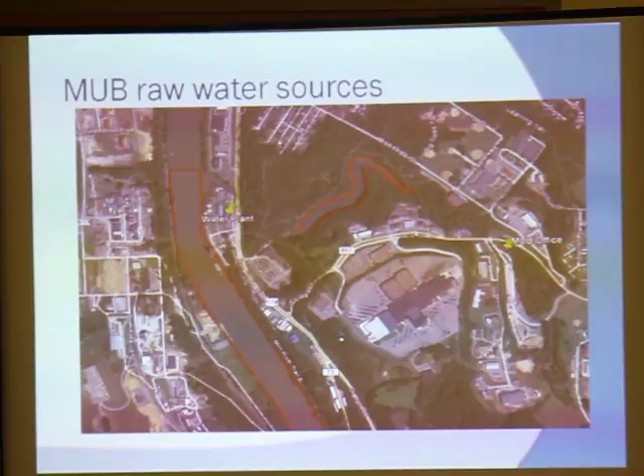For 2014, that's the data I'm going to speak with. That's the most current year I have to work with right now. We processed over 4 billion gallons of water. That's a heck of a lot of water to process and put out into the system for our drinking water system. That breaks down to about 11 million gallons per day. 80% of that we actually drew from the Mon River. Okay, the remaining 20% we took from Cobun Creek.

All right, this is the table I was referring to. It is in the Consumer Confidence Report. It's on page 6. Okay, these are chemical constituents that we've done the analysis for the raw water source, the Mon River and our Cobun Creek Reservoir. I don't expect you to take a lot from this. Peruse it later on. It's just here to give you a detailed look at a bunch of the parameters that we look at when we're trying to establish what kind of water we're dealing with.

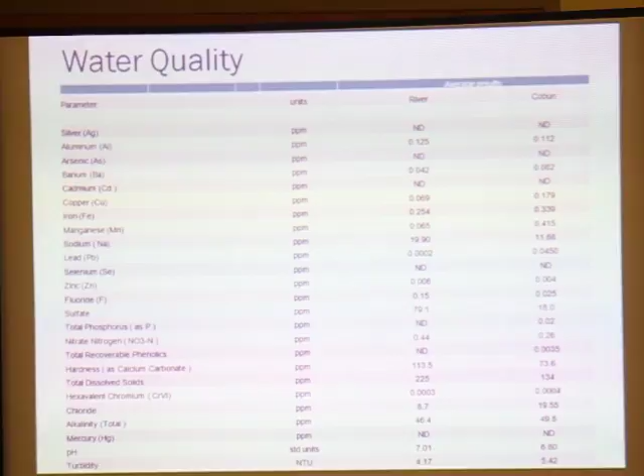Of particular importance, and maybe a little more common to people, if you look at the bottom 2, the pH and turbidity. The Mon is about a 7. Cobun Creek is just a little bit less than that. Very nice waters to deal with as far as treating it for drinking water sources. And if we look at the average on the turbidities, both are relatively low. Okay, so although the Mon does get turbulent and it does look a lot of brown sometimes because of the increased rainfall and all that, overall it is a very clean source as far as the amount of sediments that we get.

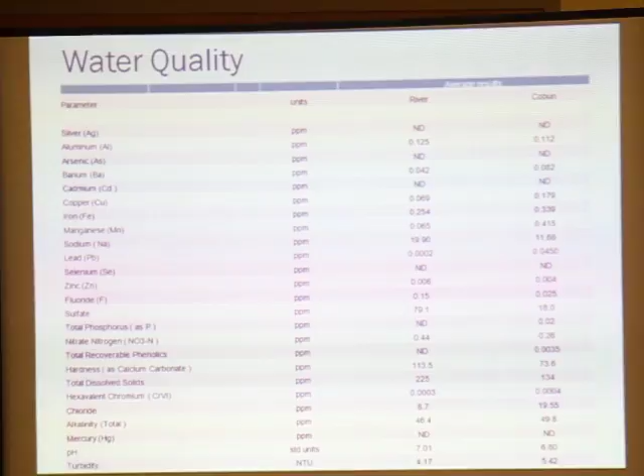Okay. I'm just going to breeze through several examples of some of the things that we've done, some other programs. If you remember back in 2009, there was a big to-do about a lot of the total dissolved solids that was found in the Mon River and then flowing up into Pennsylvania. We started a program back in 2009, and we've been monitoring the total dissolved solids in our raw water source in the Mon River up to current date.

Another program: we look at the amount of bromine or bromide that we find in our raw water. This is a concern for us because that is a halogen that can react with the chlorine that we put in for disinfection. And that, along with some total naturally occurring carbons in the water, will form what they call THMs, the trihalomethanes. We're regulated underneath that very strictly down to parts per billion levels. So the amount that we find out there can be significant to us.

We've been monitoring that since 2011 on a weekly basis also. We find very little of it out there. The little bits of spikes that we do and we have seen, those are pretty much related to events where someone has in the past been treating brine water from some of the gas well operations. Treatment plants on the wastewater side normally do not treat for the TDS very well, so it's almost a pass-through. That's why that practice has been stopped in the wastewater industry.

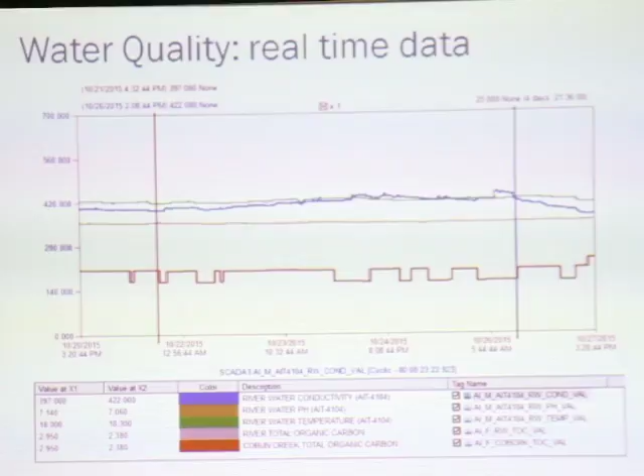As part of the program, we do look at our source water, and the initial data that you saw in here is just from some grab samples of our source water. With the advent of everything that's going on in our source water protection program, and we'll get into a little bit more when we start talking about it, we have developed a program where we're now actually going up into a large portion of our watershed system where we drain the water from.

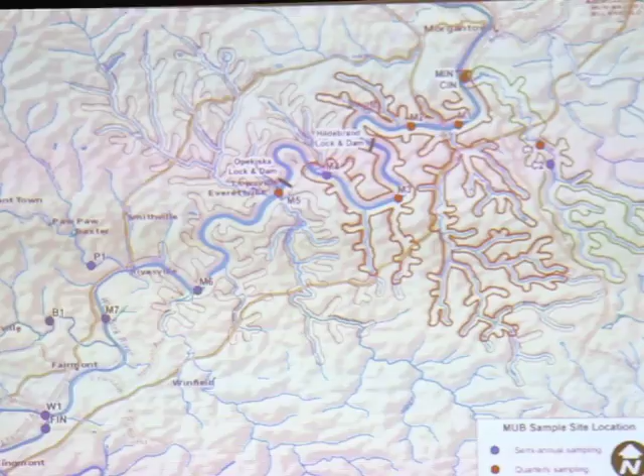This point right here, that's where the active plant is, our treatment plant. So we actually have 14 more data sites now that we're looking up into our watershed and going out there at least quarterly and sampling these sites for the different constituents. This is important, not that we're going to catch something just when we're sampling it, we might, but what this is doing is actually giving us a long-term database, so we can look at what natural trends are happening out there. We can see what's happening on a seasonal basis.

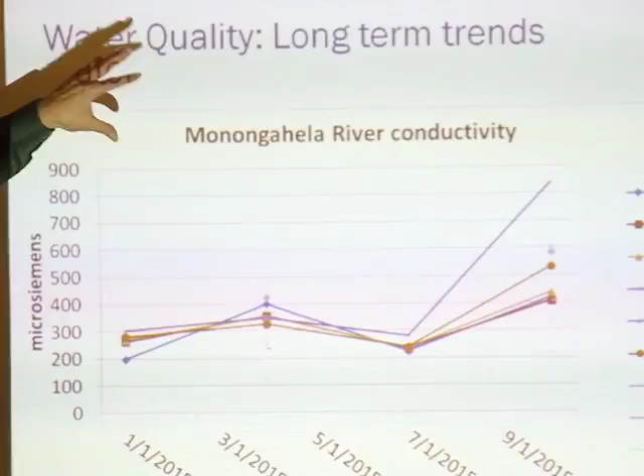And this is just an example of what we've already sampled on the 4 quarters there. But this delineates all the sites going up on the Mon River. This is conductivity. And you can see pretty much from the beginning of our sites all the way down through, pretty consistent. We have a little anomaly that we're looking at down here. This is readily explainable. This is during the fall, very low flows.

So what's coming into the Mon is not really being diluted. So we're seeing an increase in the amount of solid concentration just because there is not that much flow coming down to dilute it. So that's an example of a seasonal trend that we're going to be seeing. And as we develop this data over the next 2, 3, 4, 5 years, we'll start to get a real good database as to what's happening out in our drainage system with our tributaries.

There's also a bunch of other stuff we do. I'm not going to touch on all of it, but one thing that is significant: we have some Marcellus gas wells in the Morgantown Industrial Park. They actually reside almost right across the river from our water plant intake. Drilling and fracking operations started and have been going on since May of 2011. That's when they initially drilled the wells and fracked them. That period was pretty much very short, for about 4 or 5 months.

We did some very intensive sampling. And since then, we've kind of done it every month, every 4 months, every 6 months, just to monitor the progress of what's going on there, to make sure none of those activities has had an effect on our drinking water. Results to date, we've been very good with that. We have not found anything from those type of activities that has had an effect on our water supply.

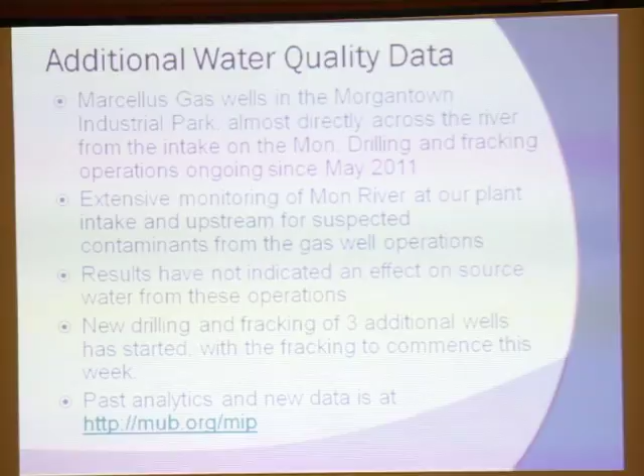Yeah. All right. That's just a very brief overview of some of our monitoring activities that we're looking at with the source water. Just a real quick look into the source water protection plan as far as monitoring upstream. We'll get a little more into that when we start talking about the program. Thank you.

So now with that background, we know that we're lucky here in Morgantown to have clean, raw water supplies. But clean raw water supplies can be fragile, and we learned that back in 2014 when 300,000 people lost their drinking water supply due to a chemical leak in the Charleston area. And it's been almost 2 years now.

One sort of silver lining out of that is that there was some activity in the legislature who were personally impacted by the leak. And a bill was passed in 2014, it was Senate Bill 373, that was a very large bill that had a lot in it, but among the most important parts of it were this first requirement here for water utilities across the state, like MUB, to update their source water protection plans. So that's what we'll be talking about mostly today.

Also for utilities to update their inventory of potential contaminant sources. And we'll be talking about that as well. That's part of the planning process. And separate, there was an entirely new law that regulated above ground storage tanks, because it was an above ground storage tank that leaked that caused this problem in Charleston.

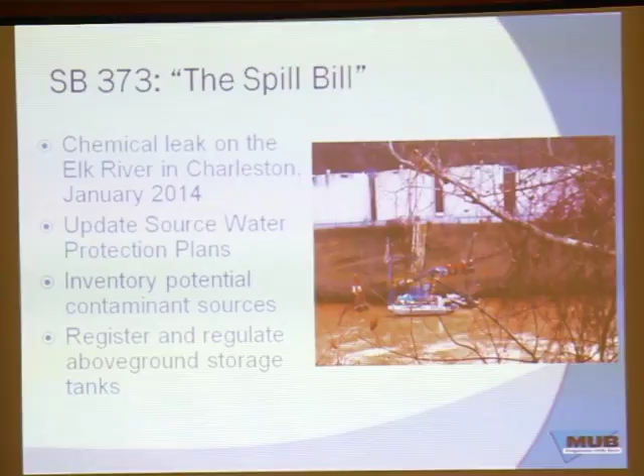A year later, so now we're in January 2015, the legislature took some additional action. This was Senate Bill 423, where they made some significant changes to the above ground storage tank act. Among them, there's many fewer tanks that are now regulated as compared to when the original bill passed. But the good news from Senate Bill 423 is it had virtually no impact on the requirements for utilities to update their source water protection plans. So all across the state, there's about 120 utilities that are now doing what MUB has been doing.

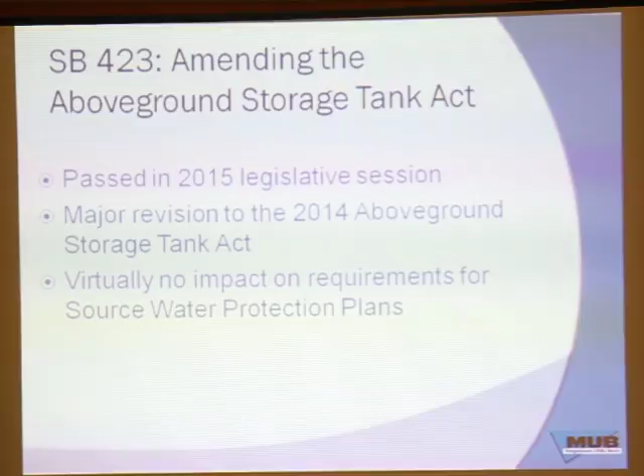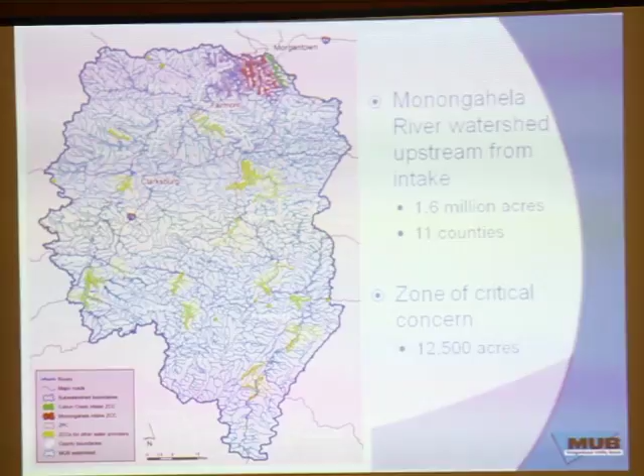This is a more detailed map of that area. It includes a couple of larger cities, Fairmont and Clarksburg. These yellow areas are zones of critical concern for other water utilities. So there's a lot of utilities that draw their water from the Mon River Basin. And again, these are the special areas up here that are closest to the intake. It includes parts of 11 counties, big area.

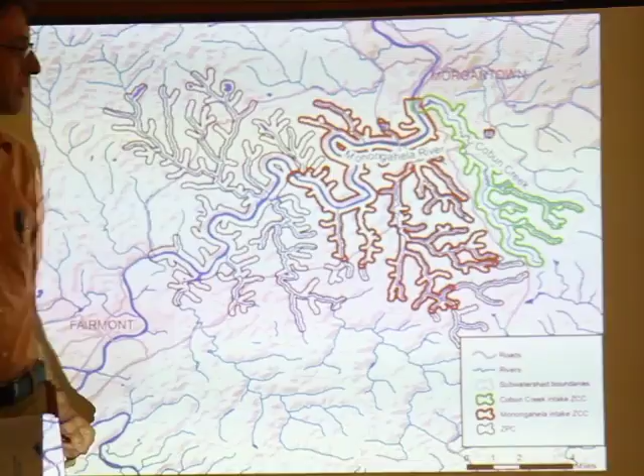Then zooming up to the water treatment plant. So we have Morgantown here and the water treatment plant here. And again, we're looking at these special zones. The red area is the zone of critical concern for the Mon River. So that's an area where water or chemical leaks or anything that reaches the water will get to the intake within 5 hours. And the green area is the zone of critical concern for the Cobun Creek intake.

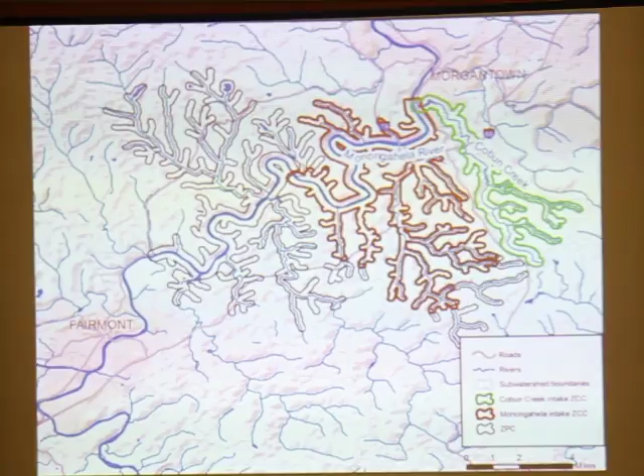And then we have a second area, which is this gray one, which is called the zone of peripheral concern. And that's related to how the above-ground storage tanks are regulated. And that's a travel time of 5 to 10 hours to get to the intake.

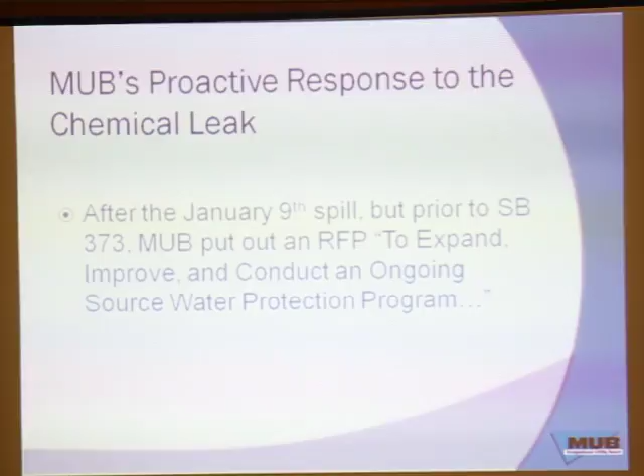MUB was moving on source water protection even before the chemical leak. They put out an RFP that Downstream Strategies, among other companies, responded to. We were eventually chosen to do the work. Senate Bill 373 has some very specific requirements, so we've been working through those specific requirements. The plan itself is almost entirely finished now.

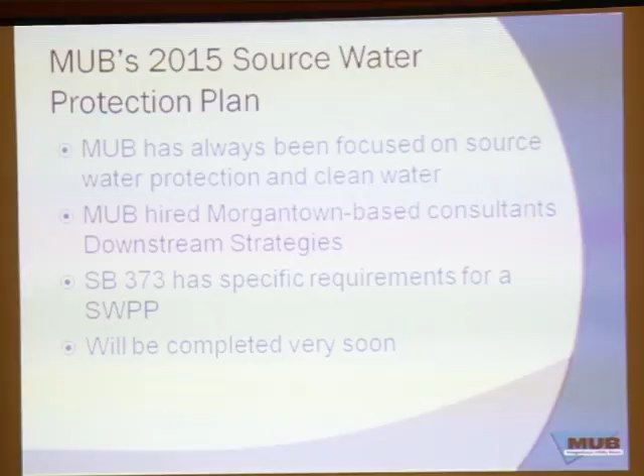But one thing that MUB's doing is going above and beyond the requirements of Senate Bill 373 in several ways, and among those is a real commitment to not just write a plan once every 3 years and not do anything in between, but to have an ongoing program to try to minimize these risks into the future. So Senate Bill 373 has many specific requirements. These are the ones that we'll talk about in detail.

The management plan is a plan to minimize the risk that contamination will occur. So you're looking up into the watershed and you're thinking about what types of steps the utility can take, local governments can take, organizations, the whole community. What can we all do together to manage those risks?

The second element is an inventory of the potential significant contaminant sources within that special zone, the zone of critical concern, although MUB is going further than that and inventorying all the potential significant contaminant sources. The third and the fourth we'll touch on. If contamination were to occur, you're in a bit of a different world and you need to have done the proper planning for a contingency plan and a communications plan so that you don't have to make it up as you go along.

Yes? Excuse me, where does the use of chemical fertilizers and herbicides fall into this critical zone and monitoring and everything? Well, I think some of those contaminants might be found in the field monitoring program. But generally those are not regulated activities.

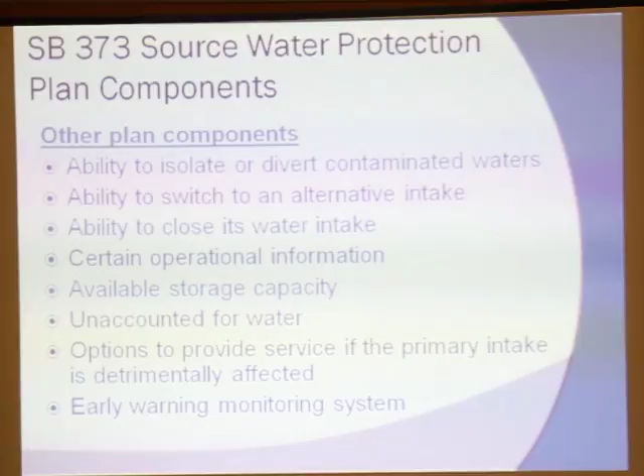There's many other components of Senate Bill 373 that we're not going to talk about in detail today. There are a lot of engineering questions that are listed up here. So just so you know, this is a comprehensive plan in a lot of ways, and it's too much to talk about in a short presentation. So again, the key ones we're looking at are the management plan and the list of potential significant contaminant sources. This is how we minimize the risk of contamination from occurring in the first place. And then the contingency and the communications plans, which is what kicks in if contamination should occur.

And the legislation was very clear in terms of the importance of involving the public. So we're really glad to have so many people interested in this issue.

To help with all these aspects of the source water protection planning, we're also developing a GIS-based source water protection and response system. This includes maps of all the potential sources. It allows MUB to figure out which ones present the highest threats. And it also provides a platform for them to respond effectively if there is a spill in the watershed. So the development has been ongoing for several months now, and it's nearing completion.

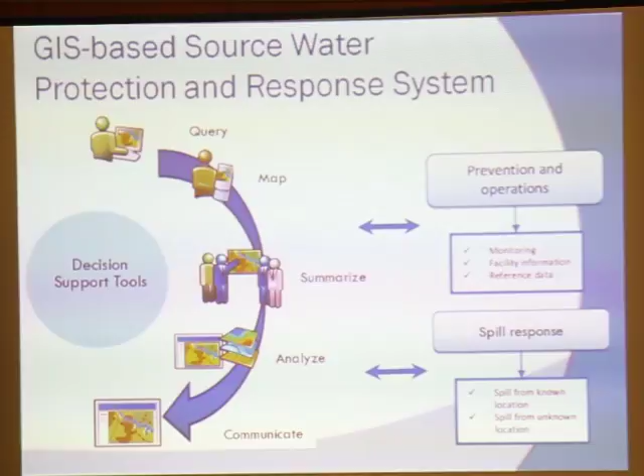So now let's just talk about the management plan, zero in on that a little bit. This is specifically what Senate Bill 373 requires. It identifies specific activities that will be pursued by the utility in cooperation with many other entities to protect the source water supply from contamination.

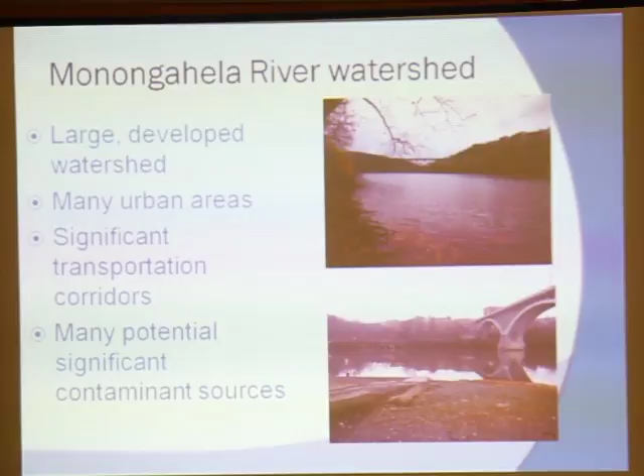And when we think about how to protect the source water supply from contamination, we think about how the Mon River watershed is a little bit different from Cobun Creek. The Mon River watershed, as we saw on the map, it's large. It has a lot of developed areas. There's I-79 and I-68. There's a lot of existing potential significant contaminant sources.

In fact, this is our most recent count of how many potential significant contaminant sources there are. And there's other categories that we're not showing here, but there's hundreds of permitted coal and non-coal sites. There's 342 active Marcellus wells. There's almost 12,000 above-ground storage tanks in that big area. So there are a lot of potential threats out there.

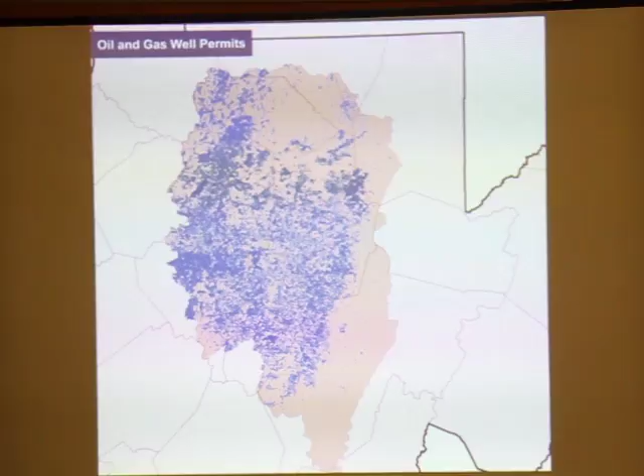And then within the zone of critical concern, obviously there's many fewer. Those are ones we need to pay particular attention to. And these are just to give you sort of a visual of what these potential contaminant sources look like. So there's oil and gas well permits across most of this huge area. Quite a lot of them. A lot of above-ground storage tanks as well.

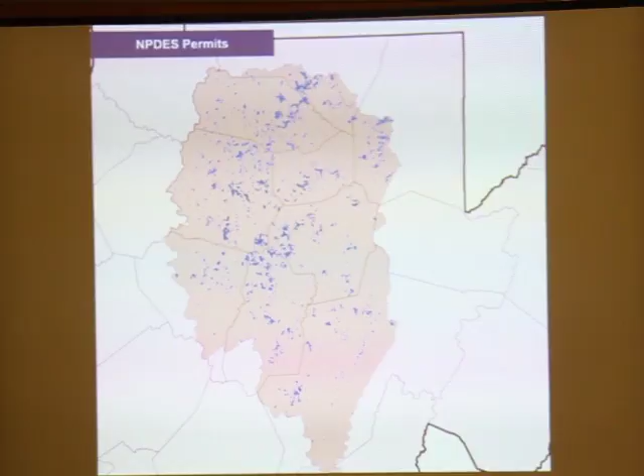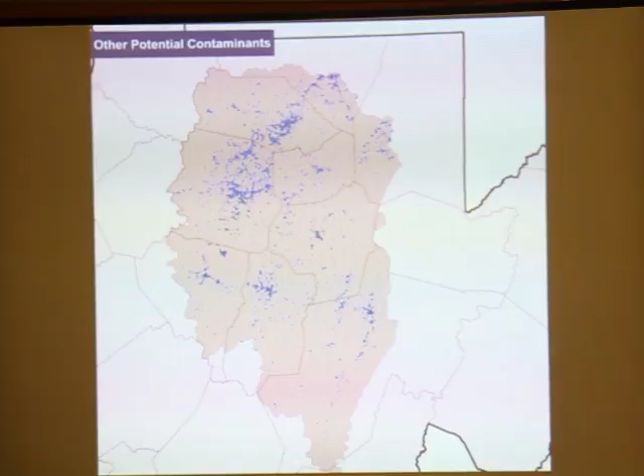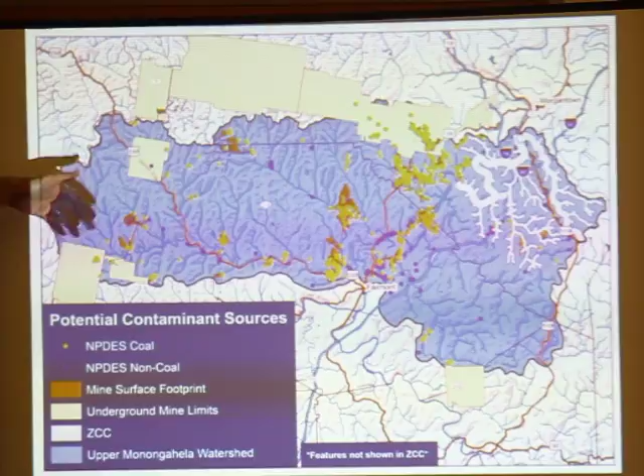And the blue area is the part of the watershed that drains directly into the Mon River. So it's a tributary of the Mon River. Above Fairmont is where the West Fork and the Tygart Valley rivers come together to form the Mon River. So we're just focusing on the area downstream of that. And we have a series of maps. This shows the yellow circles are permitted coal sites, and the purple ones, like up here, those are permitted non-coal sites.

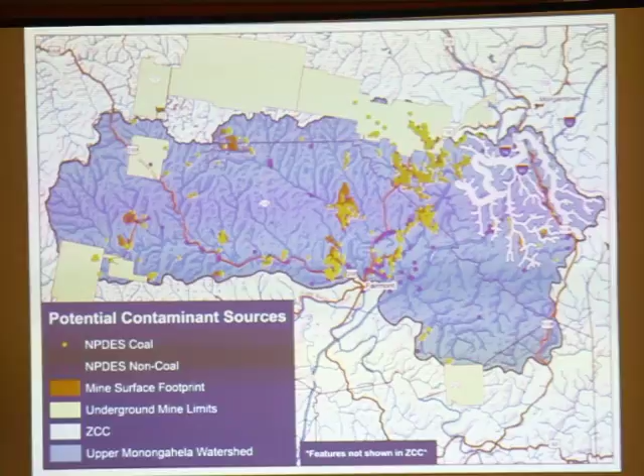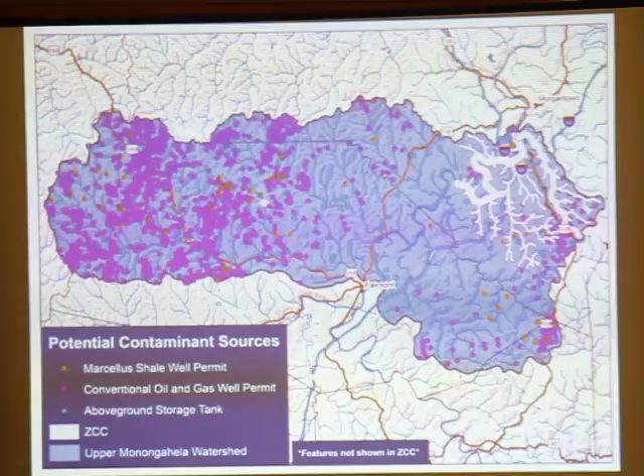Here we've got oil and gas wells. The purple ones are conventional, the brown ones are Marcellus, and overlaid on that are the above-ground storage tanks in the blue dots. Here we show some others. So just to give you a sense that, even when we come close to the intakes, there are a lot of potential threats. Now, that doesn't mean that the stream or the river is polluted. We have data that shows it's nice and clean.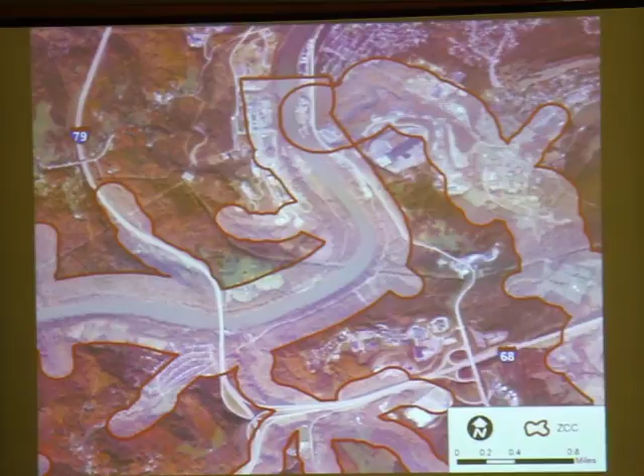And the main point I wanted to make here is that this area here is the Morgantown Industrial Park. And like Greg said, it's very close to the treatment plant. And some of the industrial park is in the zone and some of it is out. And this is one reason why MUB is being prudent in creating inventories of these potential contaminant sources, not just within the zone, but also outside the zone. Because while the zone is important, it's not like everything outside of the zone does not present a threat. There can be threats from outside the zone of critical concern.

We're specifically leaving off the above-ground storage tanks, though, due to the restricted information requirements in the law. But what you can do is get counts of the above-ground storage tanks by owner, so you can know generally which above-ground storage tanks are on MUB's radar.

So given that there are all these potential contaminant sources scattered around the watershed, what are we doing to minimize the risks? Well, first of all, we're inventorying them so we know where they are. Secondly, we've been looking at aerial photographs to make sure that we're not missing any. And at least close into Morgantown, we've been performing windshield surveys, driving around and making sure we don't find anything that was not built when the aerial photographs were taken.

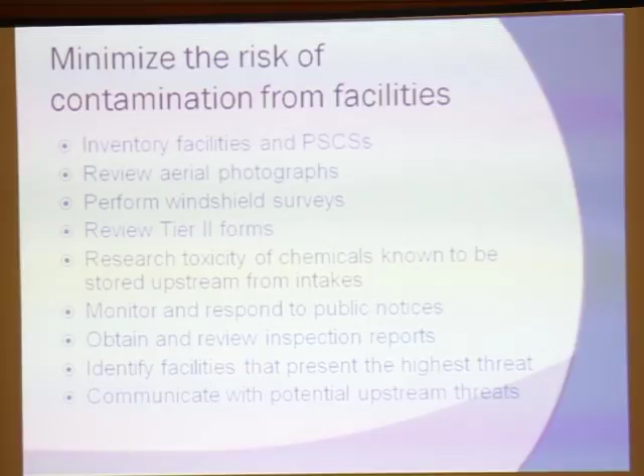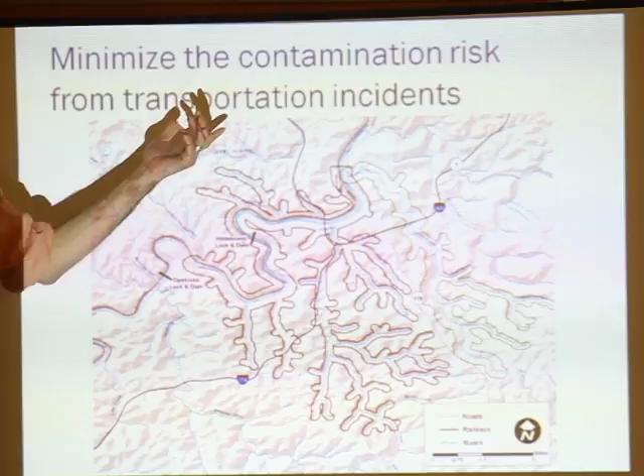It's not just the stationary facilities that present a threat. There's also the risk of transportation accidents. Like I said, we've got the highways. I-68 crosses both zones. It crosses Cobun Creek, as a lot of people know. I-79 crosses the Mon River. There's barges that run on the Mon River. There's a train that runs along the Mon River, so those are all threats as well. So we're trying to take into account those threats as well.

Where in these threats, if any place, is there attention to the use and abuse of household chemicals? I mean, all along the river, there's developments and all these other big hardware store chemicals being used.

We're not inventorying those as specific points that are threats, but MUB does have programs in place to help collect household hazardous waste and to try to minimize the risks that they present. So we're trying to do public education so that people know that they're hazardous, and we're trying to make it easy to dispose of them properly. Could you describe that collection process or schedule? Does anybody know offhand from MUB?

Well, so far it's been annually. We've had good response to that. We hope to increase that to semi-annual, but right now it's annual. We just conducted it about a month ago or so. I think we collected, Chris, was it about 18,000 pounds? Actually, this year's probably about 16,000, we did almost 18 last year. Generally, the budget for that single event runs in the range of $30,000 or so, $35,000 annually.

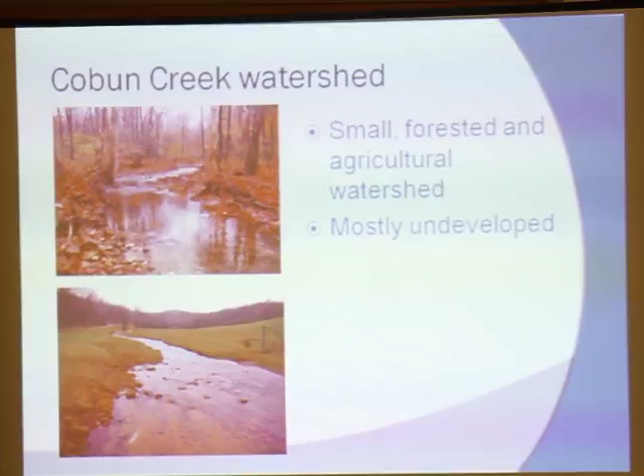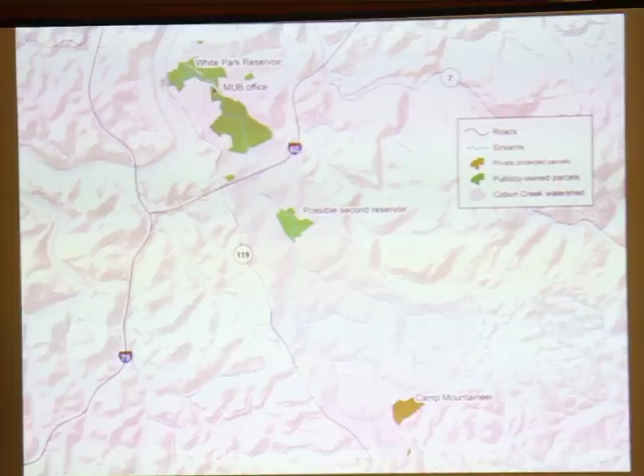Hey Evan, on that map, can you point to where the intake is at Cobun, as well as the intake on the Mon? Well, I can't point to any intakes, but I can tell you where the reservoir is. The White Park Reservoir is up here. Okay. And the water treatment plant is very close to the reservoir on the river. You can't point to them because you can't identify where they are by law. Yes, it is. That's a Homeland Security thing?

Yes. Okay. So there's some additional actions that MUB is considering taking in the Cobun Creek watershed. Some additional education and outreach to people who live there. But there's also the consideration, given that there's a reservoir there, and as we'll hear in just a few minutes, there's a proposal for a new, larger reservoir there. The best way to make sure that the water in those reservoirs is clean is to try to preserve the land above it. Make sure no Freedom Industries gets sited above that reservoir, for example.

And one way to do that is to purchase land if there's willing sellers, or to negotiate conservation easements if there's a willing grantor of that easement. So this is something that MUB is giving strong consideration to, and it's also something that people in the community can play an important role in. And we're also researching incentive programs and funding opportunities that could help keep Cobun Creek clean.

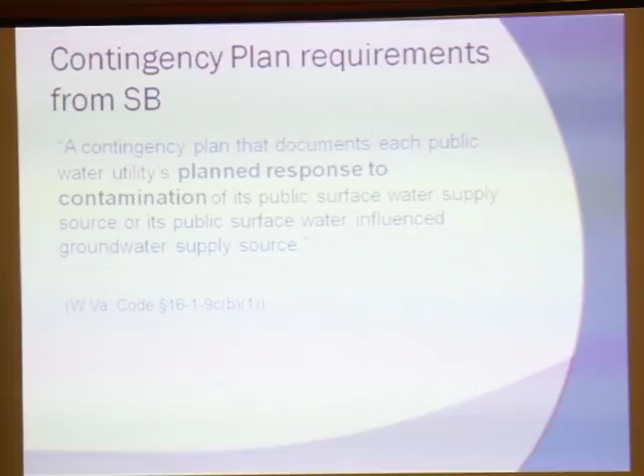So that was all about the management plan. I'm just going to quickly say a couple words about the contingency and communication plans. This is the requirement from Senate Bill 373. It's a document that explains the planned response to contamination of the water supply. Among other things, we need to quickly identify if there's an emergency, initiate effective response actions, step-by-step actions that MUB and other partners take, and a communications plan that goes along with it.

So we have worked with MUB and with MECCA 911 and the health department and other partners to develop a contingency plan. That's part of what is virtually done now, the broader source water protection plan. And linked to that is the communication plan. So this is a communication plan in the case of an emergency. Who do you need to communicate with? What's the best way to reach them? Who should actually do that communication? And what are the priorities? Who do you tell first? Who do you tell second?

You know. So examples are, you want to get the word out to local elected officials. You want to get the word out to the media. You want to make sure WVU knows. You want to make sure the general public knows. How do you organize all that and get it done quickly and efficiently? So that's my summary of the source water protection planning process. The remainder of the presentation is going to be given by Tim Ball, the general manager of MUB. He's going to talk about the proposed construction.

Everything that Evan discussed really is about trying to manage the risk so that the probabilities of a contamination are reduced. And then he closed by talking about the contingency plan for how do we respond if an event happens despite those efforts. And so that's where I pick up here. The major difference between Morgantown and Charleston, and by the way, I'll just be frank with you, our unofficial slogan at MUB has become, we don't want to be Charleston. I mean, the experience that they had was terrible. And I would hate for our community and our staff to go through that. And we're doing everything we can to make sure that that does not happen here.

So, to get to the bottom line I'm setting you up for, we need a new, much larger reservoir. The existing reservoir was built in 1956. Its original volume was 56 million gallons. And at that time, the average daily usage of the Morgantown water customers was about 3 million gallons a day. So that meant that reservoir, in 1956, had about 19 days of storage.

Okay? Today, its useful volume has been reduced to 38 million gallons. We've lost about 18 million gallons due to sedimentation. Just soils, slowly over time, washing into the reservoir, have filled it and reduced its useful volume to 38 million gallons. At the same time, our daily usage of water has increased to 11 million gallons a day. That's about 3.4 days of storage. Okay? So 19 useful days of storage has been reduced to 3.4.

That's an uncomfortable margin of safety. And we do rely upon it frequently. What was the volume of the Tibbs Run Reservoir? I'm sorry, I don't know that number. They're very, very small. Yeah, I know it's less. A lot less. Right.

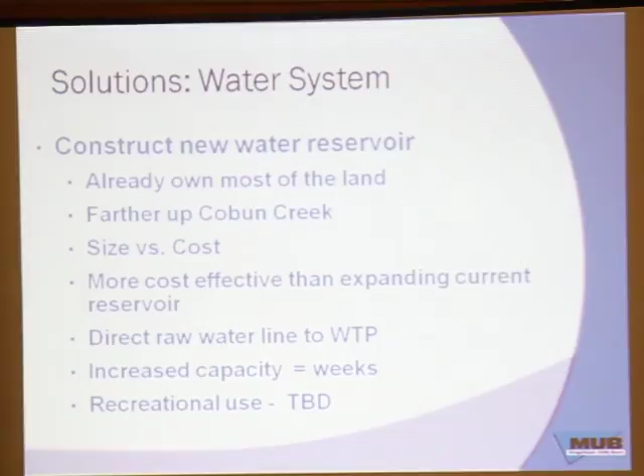The existing reservoir has served us well, but we've simply outgrown it. So we're proposing a new reservoir, and really that new reservoir has been part of MUB's long-range plan since the 1950s. This property in the Cobun Creek Valley was purchased in the 50s for the purpose of building the reservoir that I'm now describing to you and proposing to build next year.

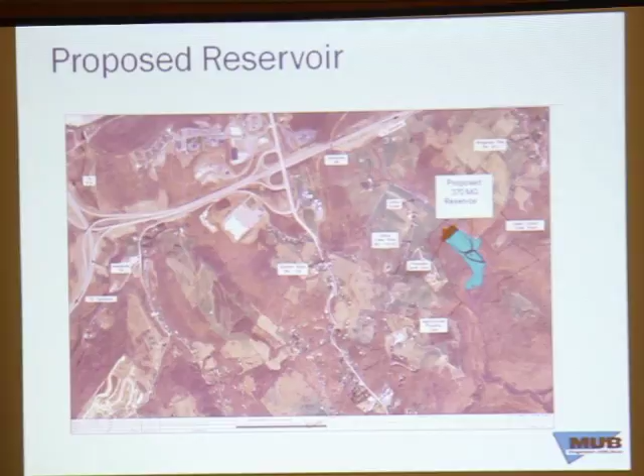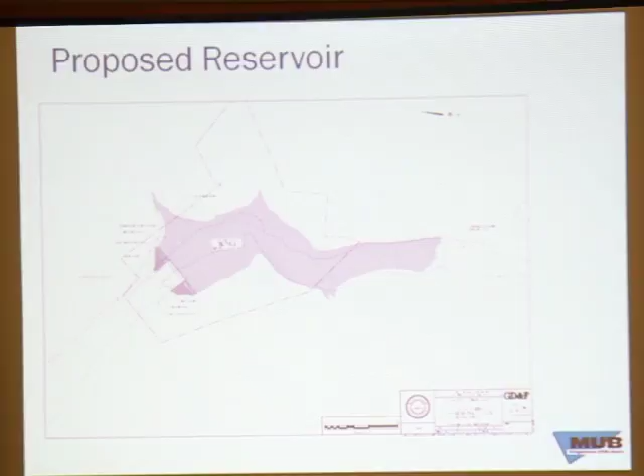You've already seen an image showing where that reservoir is located. We're proposing that that reservoir should be about 370 million gallons, be a 60-foot tall dam impounding water at a depth of about 48 feet at the dam. And we're going to need some additional land upstream of our existing property in order to fit that size of reservoir in there. We looked at a number of alternatives.

We first considered concrete versus earthen dam. All the cost numbers that we're showing you here are for the earthen dam only. Concrete would be roughly twice the cost. That pretty much knocked concrete out of consideration from the beginning. So earthen dam is really the only economical alternative for us. We've looked at them at 3 basic sizes and really other sizes in between. And this slide really demonstrates economy of scale. Just like when we buy toilet paper at Sam's, the more you buy, the cheaper it gets. Okay, and the volume in the reservoir is much the same.

If we built the smallest reservoir volume, only a 40-foot tall one, 117 million gallons, that cost would be roughly $17 million for a unit price of about 14 cents per gallon. What we're proposing is the bottom one, the 370 million gallon reservoir, for about $4 million more, $20.6 million. Notice the cost per gallon is less than half of the smallest option, only 6 cents per gallon.

The main thing to look at are these days of storage. And I've given you 2 columns, one at 11 million gallons a day and one at 16 million gallons a day. 11 million gallons a day is our current rate of use. All right? So this 370 million gallon reservoir today will provide 33.6 days of storage. Now that's a comfortable margin of safety compared to the current 3.4.

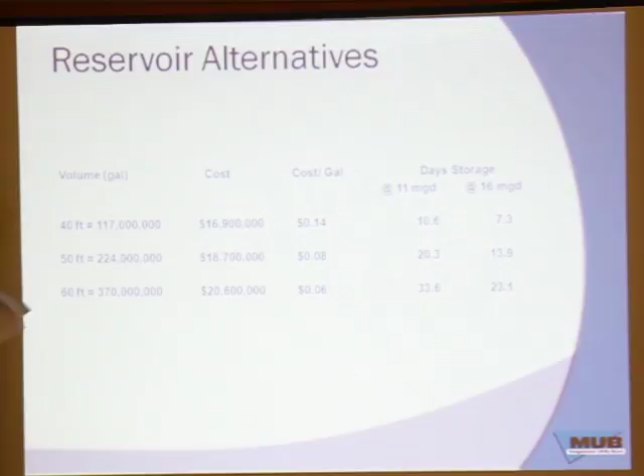We do have projections that say that our community's demand for water within about the next 30 years or so is probably going to increase to 16 million gallons a day. So that's the long range plan. And if so, that 370 million gallons will then serve 23 days of storage.

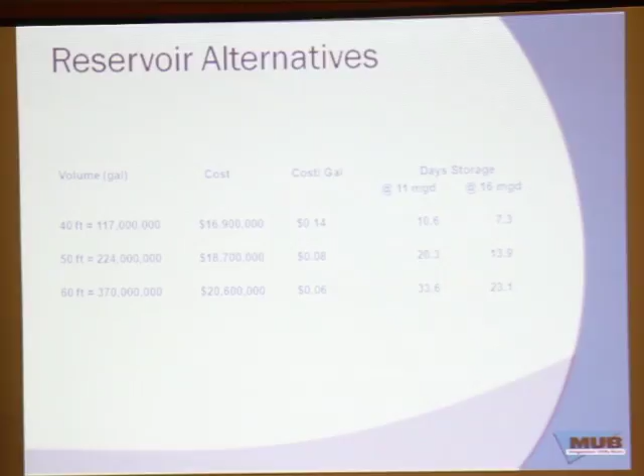Recognize that there's one other improvement that we need to make to the water system. The secondary reservoir really provides reliability to the water system. It gives us another option to go to if for some reason the river's not available to us. So that improves the reliability of our water supply. But if we don't have power, then we can't make water regardless of what source is available to us. So in order to have true reliability at the water plant, we need an auxiliary power supply.

Our plan over the years has been that we have 2 independent feeds from the power company to power the water treatment plant. Those feeds exist, and they have to be manually switched. In other words, if there's a loss of power from one circuit, we have to call the power company. They dispatch a crew and manually switch over to the second feed. We've seen over the years that their response time has slowed, so it takes longer now than it used to for that crew to be dispatched. We've also seen that the frequency for which that's necessary has increased.

We'd feel much, and our backup plan to that has always been that we would rent generators. In the event that there was a total failure of the power grid, we would rent generators in order to drive the plant. We made arrangements in advance with suppliers in the Pittsburgh area. They guaranteed us they could have generators here in 6 hours and running in 6 hours. That was our backup plan to the backup plan.

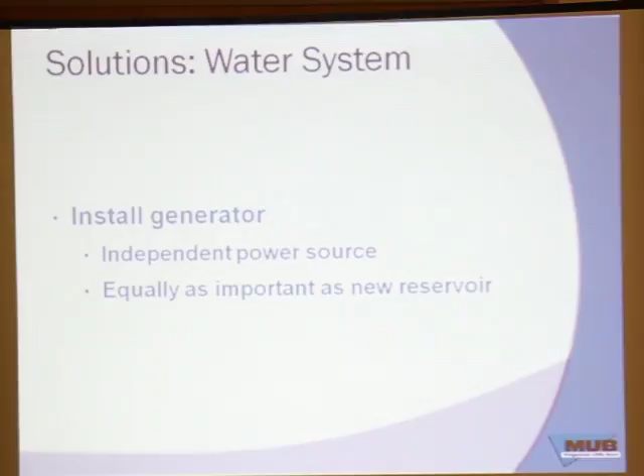All right, so my proposal to you is that for true reliability for the entire ability to produce and deliver water, we need a backup generator as well. We also have some challenges in the wastewater system. So I'm switching now to the wastewater plant. Our current wastewater plant has a capacity of 12 million gallons a day. In 2014, our average usage was 11.1 million gallons a day at that plant. That's pretty close to the capacity.

That's an uncomfortable combination. In 2011, the average usage for the entire year was actually 11.7 million gallons a day. It was affected by rainfall. 2011 was an exceptionally wet year, 65 inches of rain compared to the normal 44. Okay? 11.7 million gallons a day for the annual average against a capacity of 12. Not good. So we need more capacity. We need that additional capacity for future growth so our community can continue to grow. But that's actually a secondary reason. We need the added capacity more for regulatory compliance.

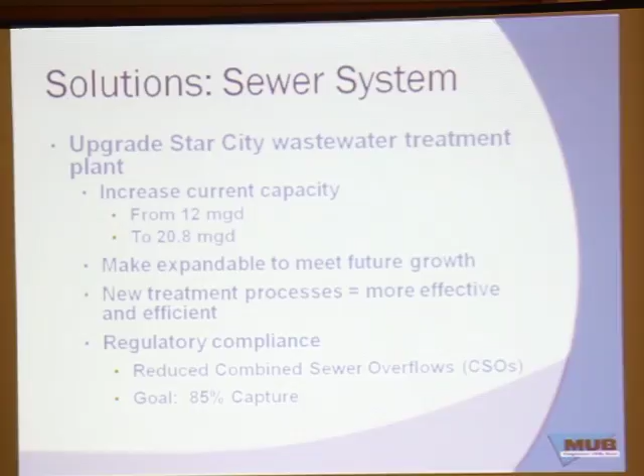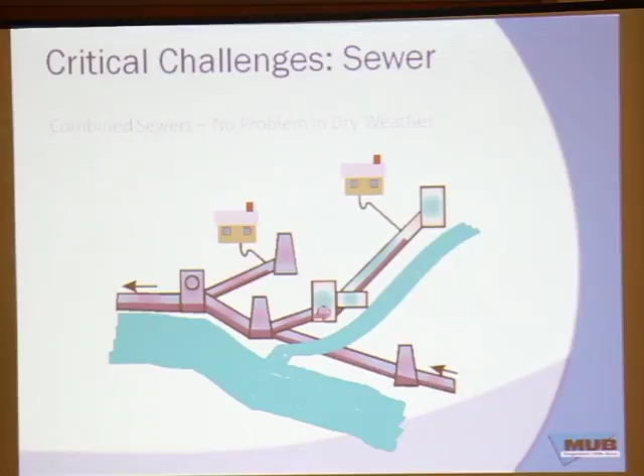We are a CSO system. That's combined sewer overflows. And this is a very simple graphic that shows that large parts of our system are designed and built so that stormwater and sanitary sewage are intentionally delivered to the same system and then conveyed to the wastewater plant. That works fine in dry weather conditions. But in wet weather conditions, when it rains, the little red arrow is the rain, the capacity of the system is overcome and those excess flows are discharged to the nearest receiving stream, either the Mon River or Deckers Creek.

Now, I would never suggest to you that that's the way these systems ought to be designed and built. Nobody does that today. But 100 years ago, that's how systems were commonly designed. That's our reality. There's a federal policy that says that these CSO overflows have to be significantly reduced. Well, one way to do that would be to separate the systems. In other words, literally go out and build a new parallel system, probably leave the old one in place for the stormwater and sanitary sewer for the new one. $300 million if we were to do that. Not really feasible for our community.

We've determined that the most economically effective and the most environmentally effective approach is for us to increase our treatment plant capacity, increase our conveyance capacity, so that we deliver these combined flows to the treatment plant and treat as much as we can there. We'll still have to overflow excesses, but those overflows will be significantly less often and significantly lower in total volume.

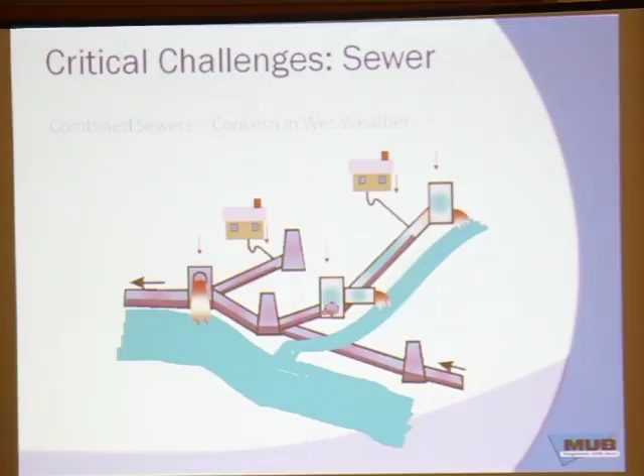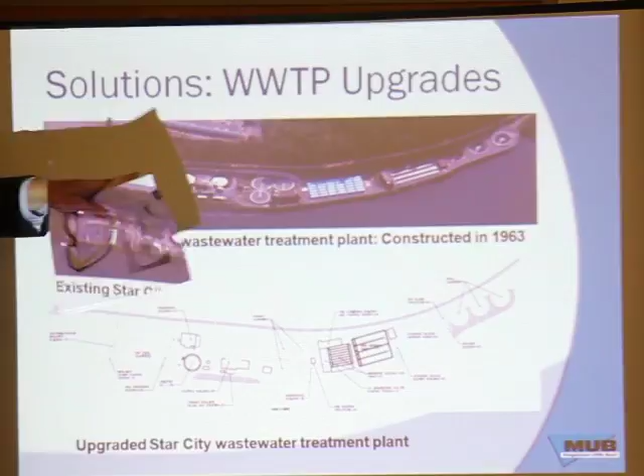So, what we're proposing to do: the upper is an aerial photo of the existing plant. These blue units here, if you actually walk by on the rail trail, they look like little Quonset huts. Those are called RBCs. It's a biological treatment process. They are antiquated, they're obsolete, they're poor in terms of their overall effectiveness. They turned out to be a poor treatment system. And they make up about 4 million gallons of our 12 million gallons per day capacity. So we need to get rid of it. Plus the other problem we have is that we're severely constrained in space. We have very little available space at our plant to work with.

So we need to remove this 4 million gallons a day of capacity and replace it with 12 million gallons a day of MBR, membrane bioreactors, which are essentially technologically advanced activated sludge, biological units that use technology in order to squeeze more treatment into a smaller footprint. So that's the plan.

In terms of dollars spent and the purpose for which it's needed, the compliance with the federal CSO policy, reducing those combined sewer overflows and increasing plant capacity in order to achieve that, is the primary reason that this new plant capacity is needed. The second reason is to replace this obsolete equipment. We're literally going to salvage yards to get replacement parts for these RBCs.

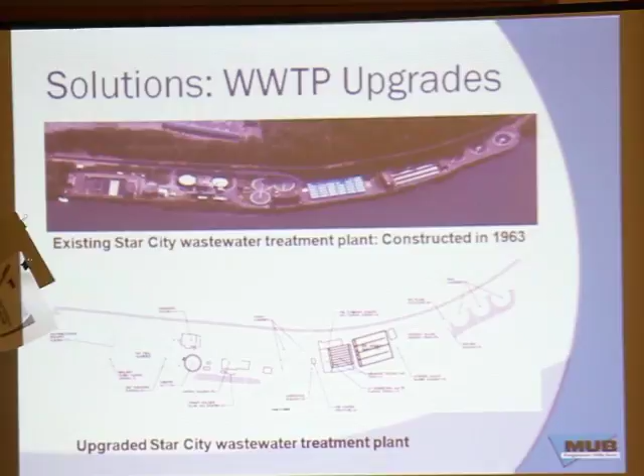Because I'm concerned that if I didn't make that clarification, people might think that, well, we're simply doing this in order to grow, and we're going to blame this on community growth and sprawl. And regardless of what you think about community growth and sprawl, the reason I'm dwelling on this is that that's not the driver that makes this capacity necessary. It's CSO, federal CSO reduction policy that really drives that need.

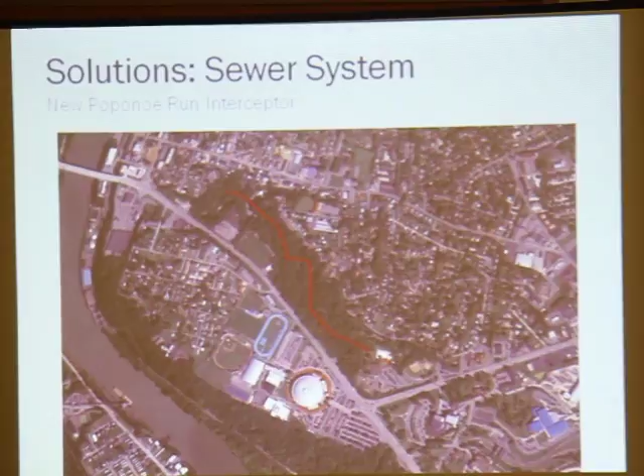One other wastewater system upgrade, about $5 million that we need to do, is to replace a sanitary sewer that runs in the Krepps Park area. It runs from Krepps Park down to actually Brewer Street in Upper Star City, right behind the old Shoney's on Mon Boulevard. So we need to replace that interceptor. It's exposed in the creek. It's in very poor physical condition. It was built in the Roosevelt WPA days.

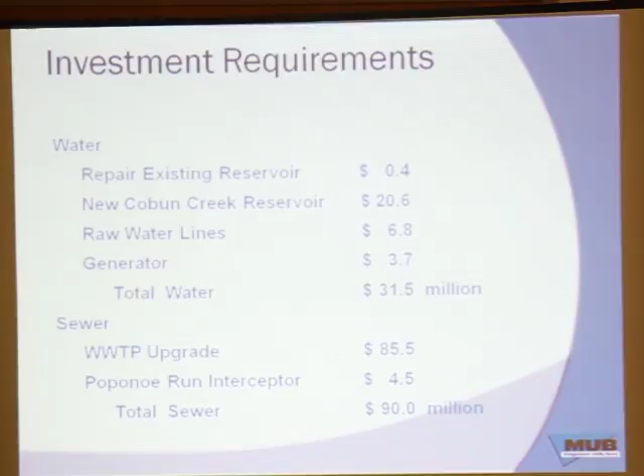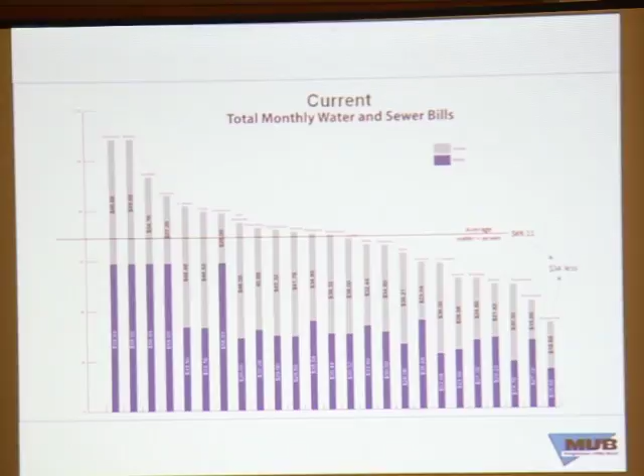What's it going to cost? $31 million for the water system improvements, $90 million for the sewer system improvements. Not inexpensive, but affordable for our community. Here's a graph of current water and sewer rates throughout the state. I'm going to pick up really quickly here. Again, we'll come back to this if you want to discuss it. The average combined water sewer bill around the state right now is $69 a month. Our current bill is about $34 a month.

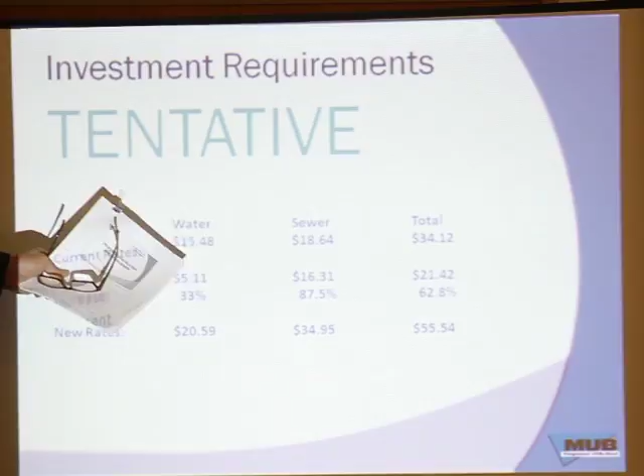Here's what we're proposing. The current water bill will go from $15.48 to $20.59 a month. The current sewer bill will go from $18.64 to $34.95 a month. The combined water sewer bill will go from $34 a month to $55 a month. So bottom line, $21 a month increase is what we're proposing for all of these improvements that I just described.

This is how that bar chart would look with those proposed increases. I'll actually show you two versions of this. This one includes the increase that the West Virginia American Water Company has proposed for its customers throughout the state, primarily the Kanawha Valley. Their proposed increase is about 28%. That average bill for combined water and sewer is about $73 a month. Ours will be $55 a month. So we're just about $18 a month less than the state average, even with our proposed increase.

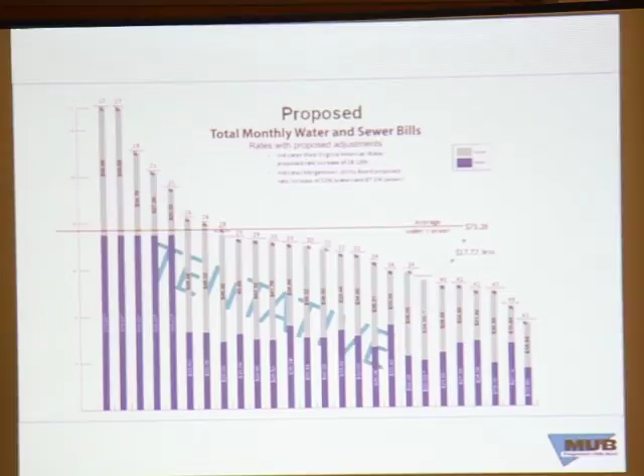Our relative rank is really shown twice here. Here's our current bill, the lowest among these 25. With our increase, our rank switches to this, sixth lowest out of 25. So yes, it's a significant increase that we're asking the community for, but our bill still remains a bargain compared to most any other comparable place around the state in an affordable amount.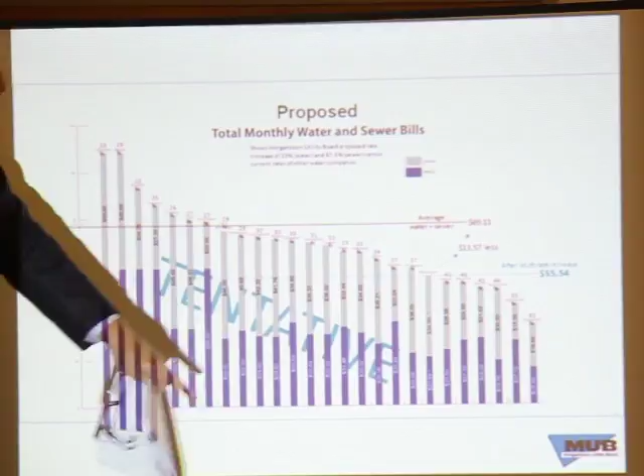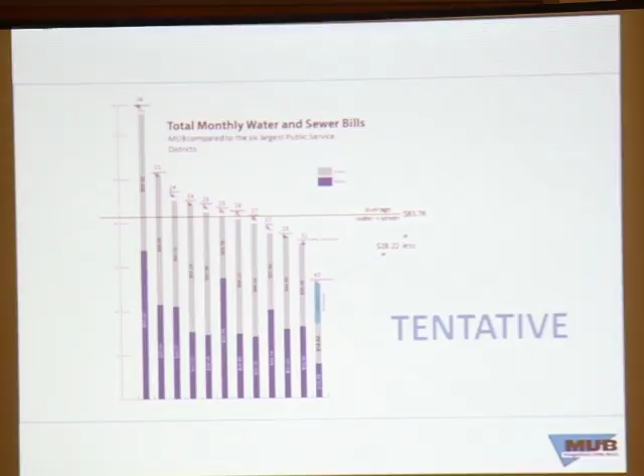And if you reject that we should include the West Virginia American increase for comparison, this slide removes it. Right, so we're back to $69 a month as the average bill around the state, ignoring West Virginia American's proposed increase. Our proposed bill is still $55 a month, and the difference is, what is it, about $14 a month. This compares us to PSDs, which are not municipally operated. I'll go ahead and skip through that.